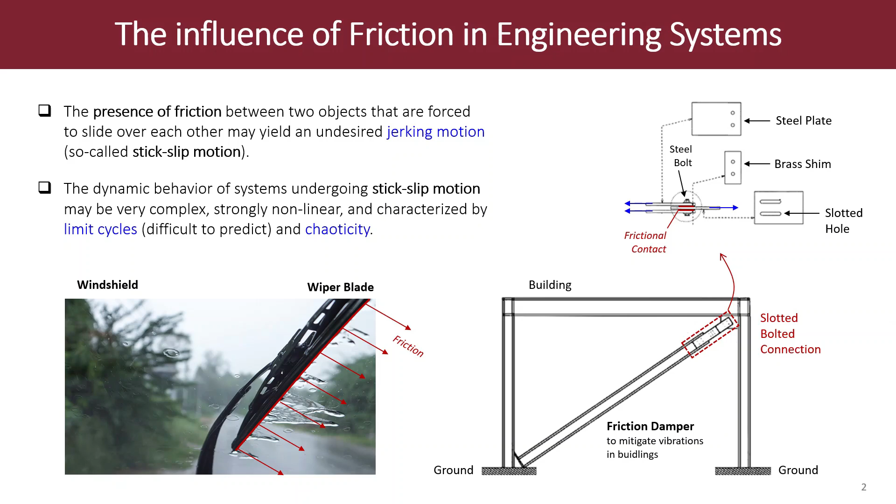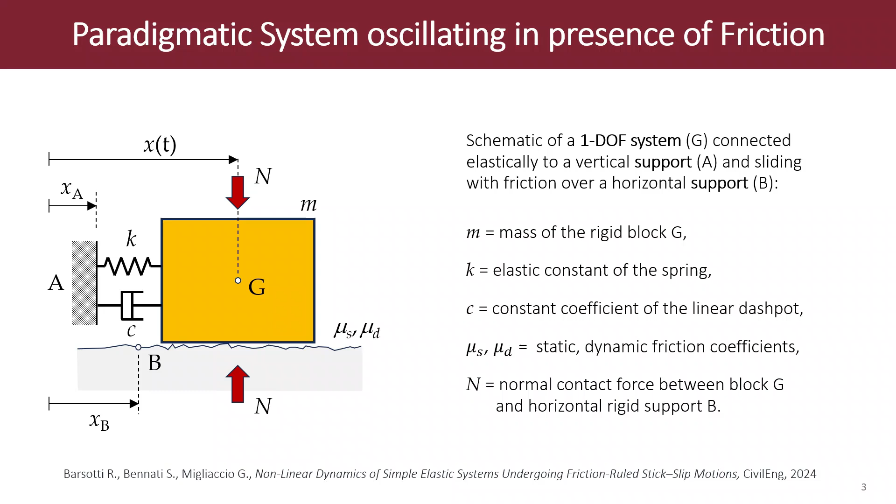Mu S and mu D are the static and dynamic friction coefficients introduced to model the frictional interaction between the block and the horizontal support. And finally, N is the normal contact force between the rigid block and the horizontal support. The system apparently is very simple, and also the equations that govern its motion are very simple. This is the equation of motion that you can obtain by using the Newton dynamic law, for instance. For what concerns the friction force, we can assume the classical Coulomb friction law.

So apparently the system and its mathematical model is not complex, but it is not trivial to predict analytically the dynamics and the eventual limit cycle of this system. To understand this, it is sufficient to take a look at the possible strategy you can use to solve the problem. First of all, according to the friction law we are using, when the relative velocity between the block and the horizontal support is equal to 0, the position of the block is equal to the position of the horizontal support plus an additional constant that depends on the initial position of the system. In this case, the friction force only comes from the equation of motion, from the Newton law.

In the second case, instead, when the relative velocity between the block and the horizontal support is different from 0, the friction force is prescribed, and the Newton law can be used to predict the position of the system by double integration. And so in the first case, you have an analytical solution that we can call the stick solution. In the second case, you have an analytical solution you can call the slip solution. So in both cases, you have analytical solutions and you can predict the behavior of the system by considering a combination of these solutions.

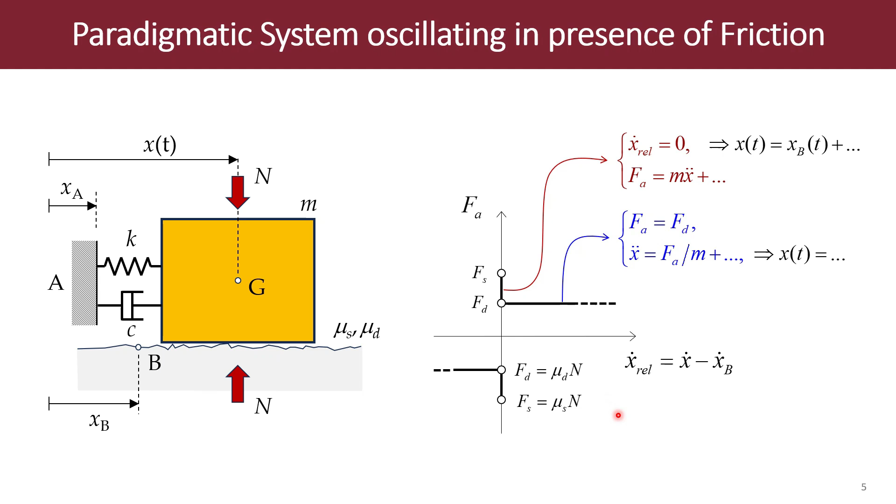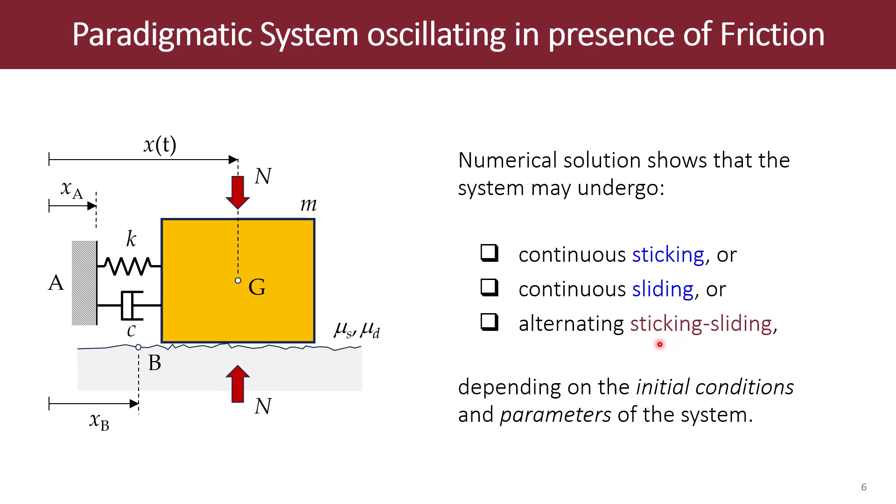But this does not allow us to predict the long-term response of the system analytically, because you can implement this algorithm, assign the initial condition, assign the system parameters, perform numerical simulations and observe that the system may undergo a continuous sticking motion or a continuous sliding motion or an alternating motion in which you have sticking phases and sliding phases, like in the case reported in this slide, in which starting from a certain initial condition, you have a sliding phase, then a sticking phase, then a sliding phase, and so on. But this is just the result of a numerical simulation. It is not possible using this approach to predict a priori the long-term dynamic response of the system.

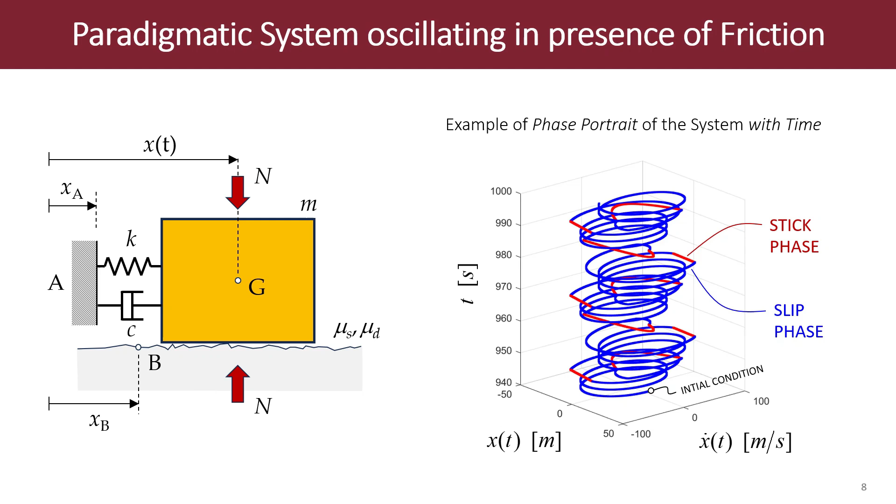So to study the effect of the friction on the long-term dynamic response of systems like this, we are considering a simplified version of the system. In this presentation, we will neglect the influence of the internal damping. We will also assume that the vertical support is fixed and the horizontal support is moving according to a periodic law, like this. Using this model, we want to predict the influence of the friction on the long-term dynamic response of this kind of dynamical system.

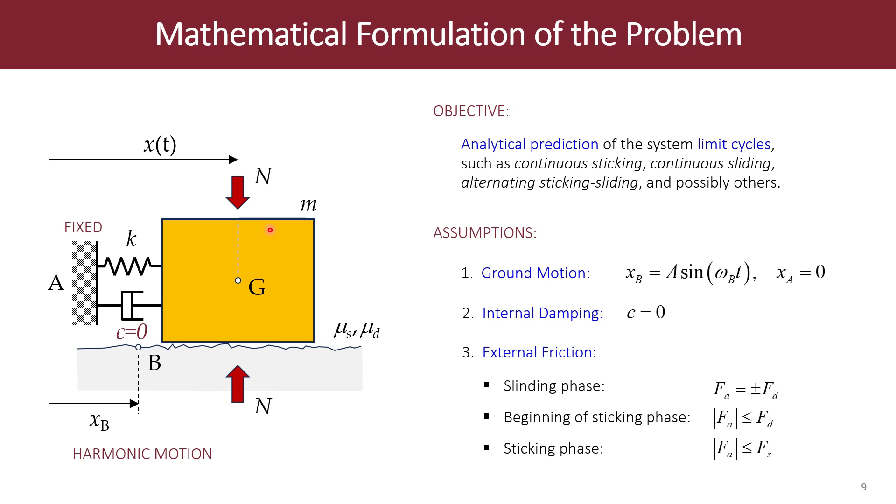So, first of all, we studied the case in which the system is in a sticking phase. A sticking motion is characterized by this condition. The relative velocity between the block and the support is equal to 0, and in this case the position of the system can be put into a simple closed form like this. Now, considering that we are in a sticking phase, that means this inequality is satisfied, and considering the equation of motion that is valid in the sticking phase, we can obtain this inequality in terms of the dimensionless parameters alpha and lambda.

This inequality is called the endless sticking condition because if we are in a sticking condition and this inequality is satisfied, the system will remain in the sticking phase. This condition is expressed in terms of non-dimensional parameters. The non-dimensional parameters necessary to introduce this inequality are the natural frequency of the system, the capital omega, that is the ratio between the frequency of the oscillation of the horizontal support and the natural frequency of the system.

And other important dimensionless parameters introduced to express this inequality are the dimensionless amplitude A, which is the ratio between capital A and a characteristic length xs, which is in its turn the ratio of the static friction force and K, the elastic constant of the spring between the rigid block and the vertical support.

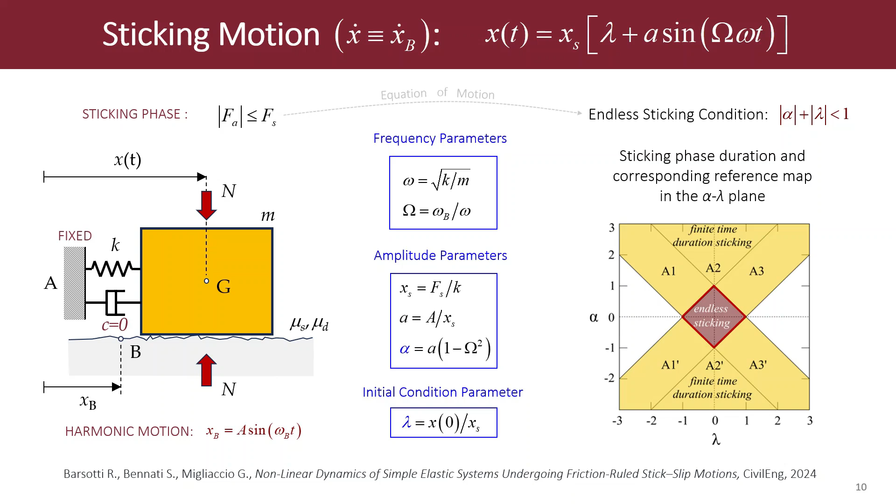And finally, the last dimensionless parameter that we need to introduce is lambda, that is associated with the initial position of the system. It is possible to express this inequality also in another form, in the form reported in this other slide. You can see here the inequality in terms of the parameter A, which makes it possible to introduce explicitly in the inequality the frequency omega.

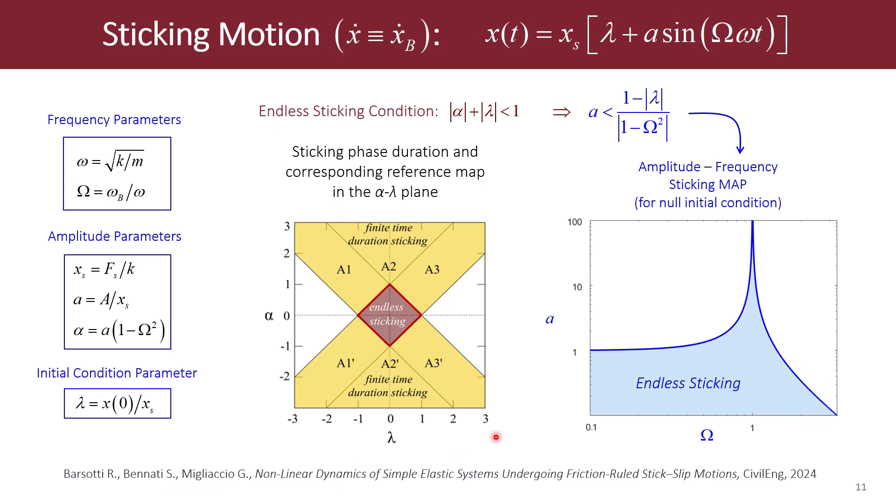If you consider a graphical representation of this inequality, we can say that if you are in the blue region of this domain, an endless sticking phase is possible. Further detail about this endless sticking condition can be found in the paper quoted in this slide. For what concerns the sliding motion, the endless sliding condition is this one. It can be found in the paper quoted in this slide.

Anyway, the solution during the sliding phase is simple to obtain. During the sliding phase, we have that the friction force is equal to the dynamic friction force. And during the sliding phase, a sticking phase can begin only if the relative velocity goes to 0 and the friction force required to start a sticking phase is not greater than the dynamic friction force.

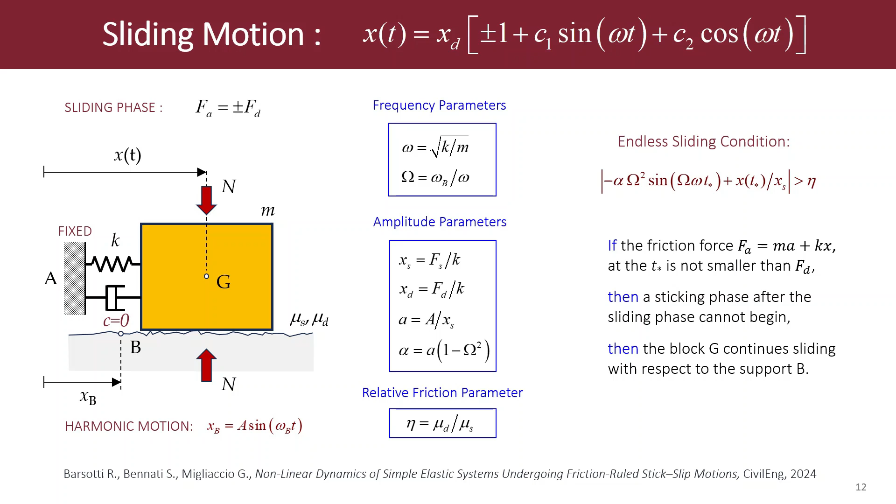In such a case, if this condition is not verified, so if the friction force is not smaller than the dynamic friction force, then the sticking phase cannot begin, and the block continues to slide with respect to the moving support. Analytically, this can be expressed by the inequality called in this slide endless sliding condition. By using this inequality, it is possible to study the existence of a sliding limit cycle.

For instance, a possible limit cycle that we have found is this one. It is a sliding limit cycle in which the position of the block is equal to 0 at a generic time instant, after half period and after one period since that time instant, and at the same time instants also the relative velocity between the block and the rigid support is equal to 0. So a sliding limit cycle that satisfies this condition is possible only if this inequality reported here in the red box is satisfied.

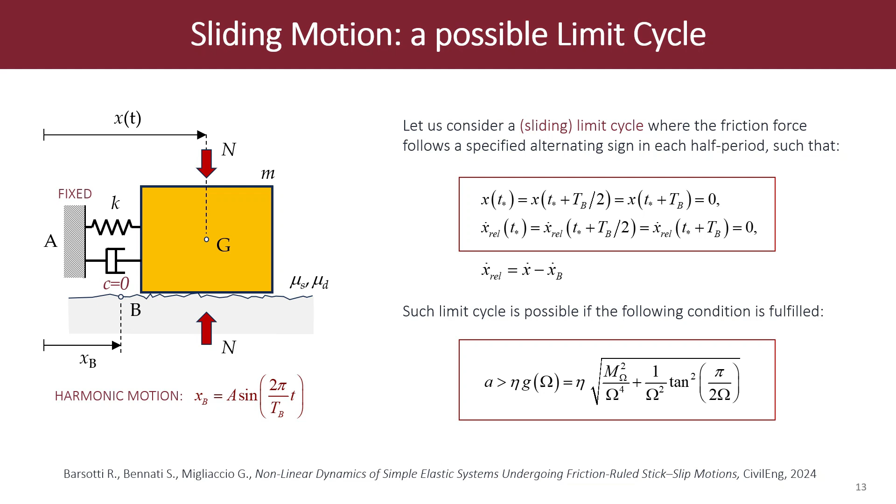It is useful to report this inequality into the domain alpha omega, and so the graphical representations reported here are for 3 different values of the eta parameter, which is the ratio between the dynamic and static friction coefficients. So in this graphical representation you can see, for these 3 different values of eta, if you are in the red regions, an indefinite sliding is allowed. If you are in the blue region, an indefinite sticking instead is allowed.

This does not mean that other kinds of limit cycle, for instance other types of sliding limit cycle, are not possible. This only means that these 2 types of limit cycle are possible if you are respectively in the red region or in the blue region.

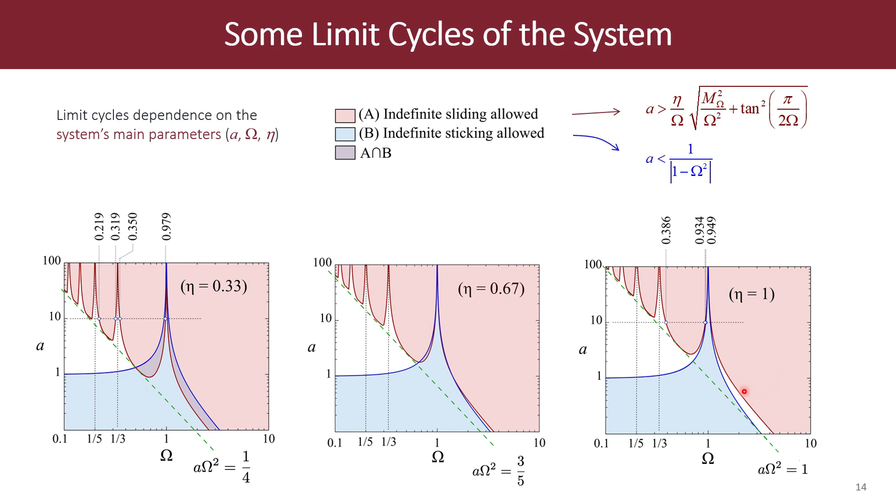We have also performed some numerical simulations to validate the analytical findings of the present investigation. For instance, starting from homogeneous initial conditions and considering a parameter A equal to 10 and a parameter eta equal to 1/3, we have performed a numerical simulation by varying the values of the frequency omega. So we move from the point in region number 1 to the point in region number 2, then we continue to increase omega and we are in region number 3, then in region number 4, and finally in region number 5.

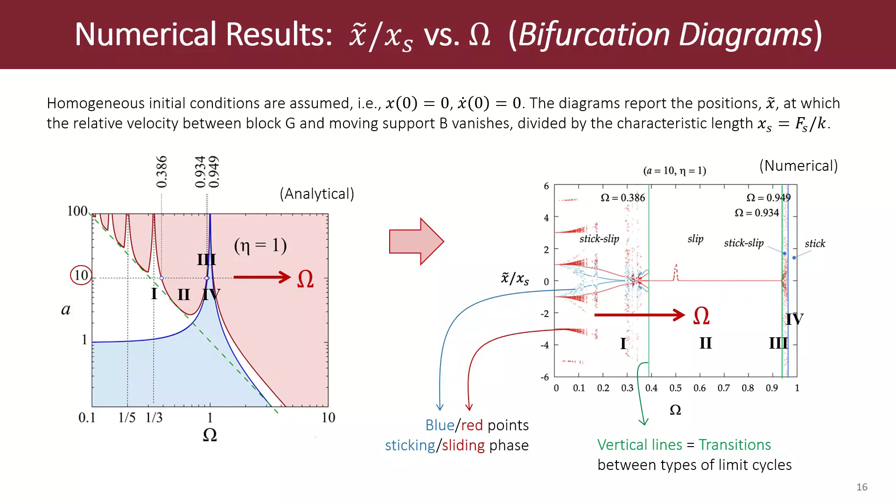We have performed a similar analysis for other values of the eta parameter, and we can say that also in this case what you can say by taking a look at the analytical map reported on the left is actually what you get by performing numerical simulation, as is observed by taking a look at the picture on the right in this slide.

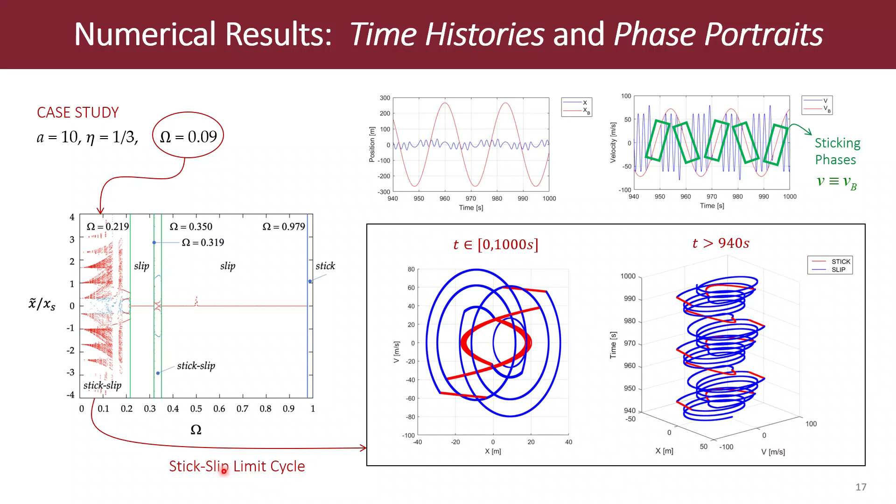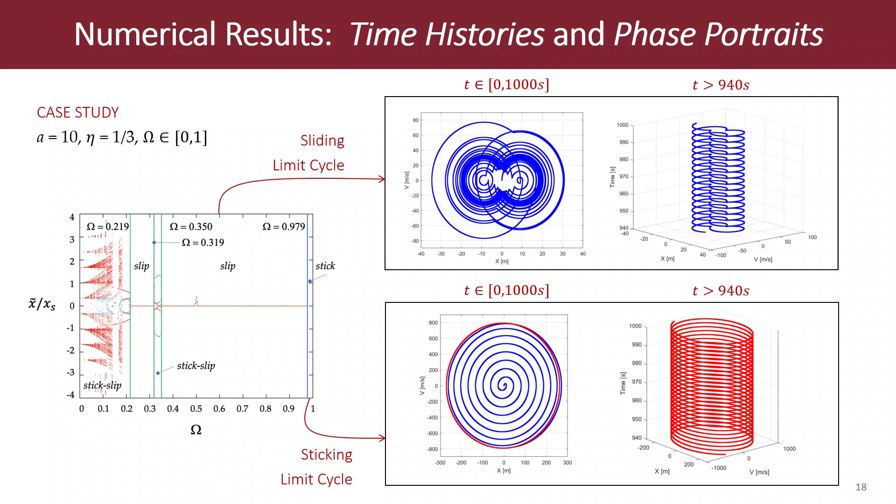We have also performed the numerical simulation and observed the time history. So in region number 1 we have a stick-slip limit cycle. In this region instead we have a sliding limit cycle like this. In the last region we have a sticking limit cycle like this. So the numerical simulation confirmed the analytical findings.

Just to conclude, during the presentation I have focused the attention on a paradigmatic 1 degree of freedom system that is connected elastically to a fixed support and with friction to a moving support. An analytical approach has been used to study the problem and the existence of certain kinds of limit cycle, and it is found that a small subset of characteristic parameters of the system can be used to fully characterize the long-term dynamic response of the system. They are the parameters A, omega, and eta.

And the analytical findings of the investigation have also been validated by performing numerical simulation, and excellent agreement has been found between the analytical and the numerical results.